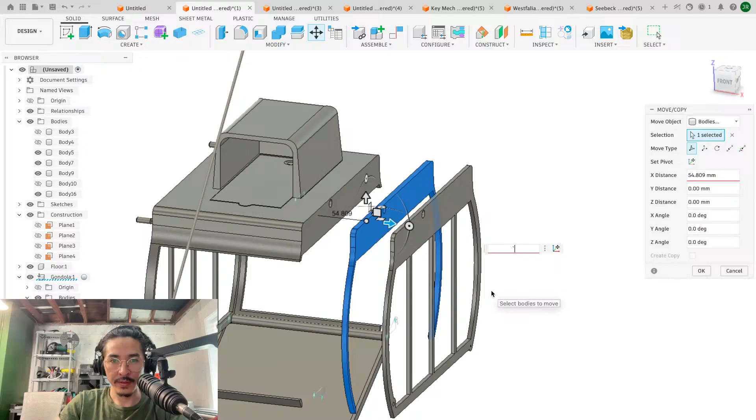Okay, so I'm gonna bring this back to...

I'm so excited to be cold tonight. I wanna get one of those mattresses that cools your body. Were we talking about this already? Or I don't know, I might have been talking about this with somebody else, but I want the part of my body that's on the mattress when I'm sleeping to not always be on fire hot.

That's honestly a good way to be, especially as the world starts relying more and more on this stuff and people are getting less and less knowledgeable and careful. I wish I had more people in my life that were a lot more diligent about that kind of stuff, but I actually just don't have that many. I don't spend that much time around other people other than my wife.

Okay, so I'm just trying to decide, I'm just going to keep splitting this up until I figure out which pieces fit together. And I've got like maybe a hair or something on my beard that's driving me crazy.

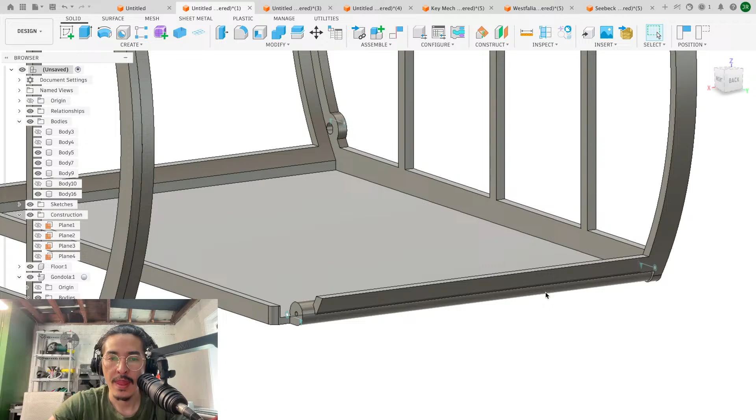So this all works if these two were together. If this was connected, if this is one piece, that would print real nice, that would be the easiest print ever. And so would the top here. The part I'm struggling to figure out is this bottom piece on both sides. I might just have to beef it up.

That was creepy, my door just opened on its own. It was probably just the wind and it wasn't latched. Let me just close it, it's freaking me out. Who's the paranoid one now?

Oh yeah, that's nice. That is nice. I couldn't tell you what's going on with my phone.

Okay, so yeah, basically, this is a good single piece, I think. This is a good single piece. We'll do the same with the other side. I just don't know what to do.

Oh, stream boo, get... boo, stream boo. Yeah, Ruby, you tell him. You tell him.

Okay, let's just go for it again here. So let's go with a splizzy. We're going to splizzy this guy. We're going to splizzy at that point. And we're going to free move.

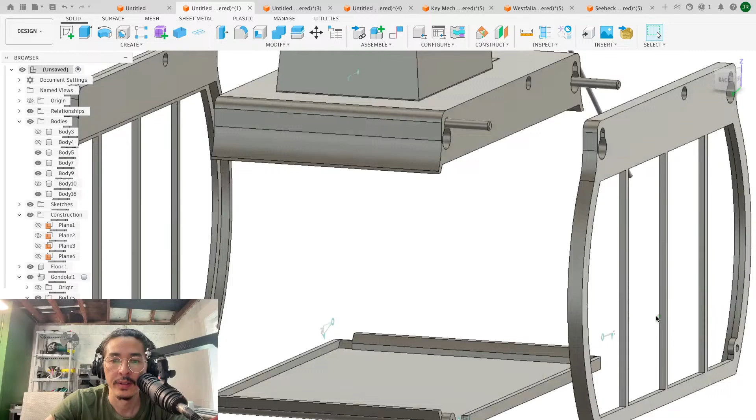So it's these pieces that I need to join to this in a way that... Oh yeah, and the other thing I wanted to think about too is how am I going to attach the acrylic windows inside of this?

Oh, awesome, you're the best.

You know what I was thinking? Because originally I was going to cut an individual acrylic thing for each window, but I may as well just cut this whole acrylic thing. And then I could even have it so that once this is screwed on, it kind of locks it in place. So I don't even need to add any adhesive or anything like that. I think we're going to do that.

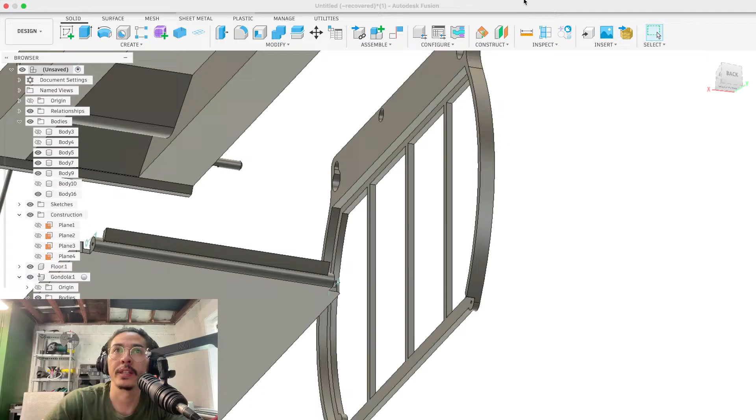I guess what I don't understand is when I block them on Restream or whatever I'm using, they just disappear. I don't see anything that happens after I block them. But you're actively getting them banned, which is dope.

5.861 mils. I think the acrylic I have, let me just take a look. Let me pull it out and see what I got.

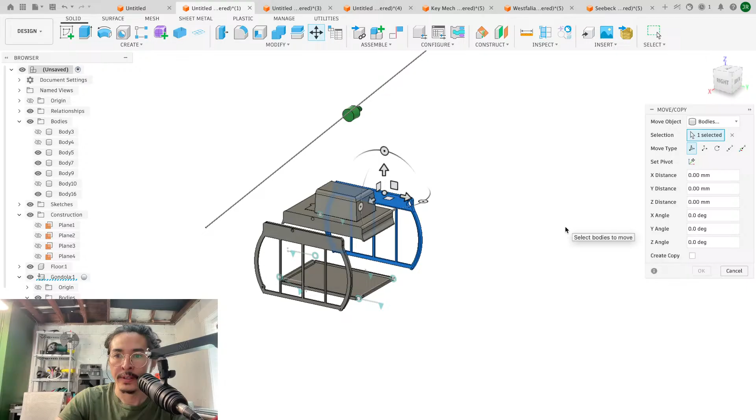So here's what I'm going to do. This piece obviously, like I think the acrylic piece is just going to be this. Oh wait, that is not a straight line.

I know it's got paper on it, but let's see how thick this is. Three mils thick, pretty much on the dot. So -3. New body. And so the issue is I only have these 2 sheets right now.

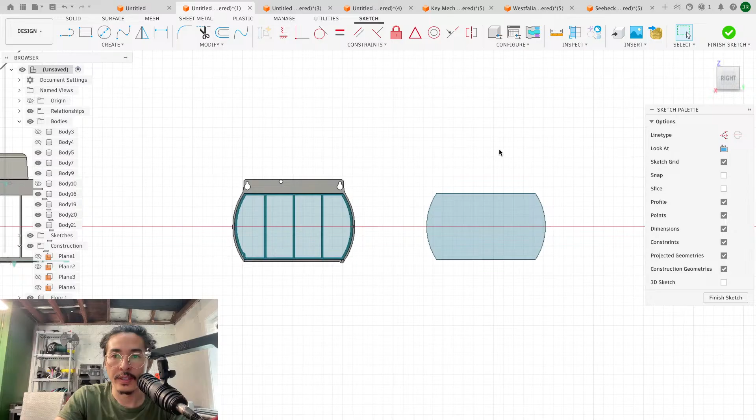The other annoying thing is the laser cutter on the H2C is too small to fit.

So one pack of these basically does - each pack comes with 2 of these sheets. So that's enough to do one. It's like 1.5.

Yeah, so this won't fit inside. This won't fit inside the printer. Unfortunately.

One pack has two of those sheets. So what if I wanted to get more of this? $60 now? No, that can't be. Wow, the black? Okay, 4 pieces for $33.

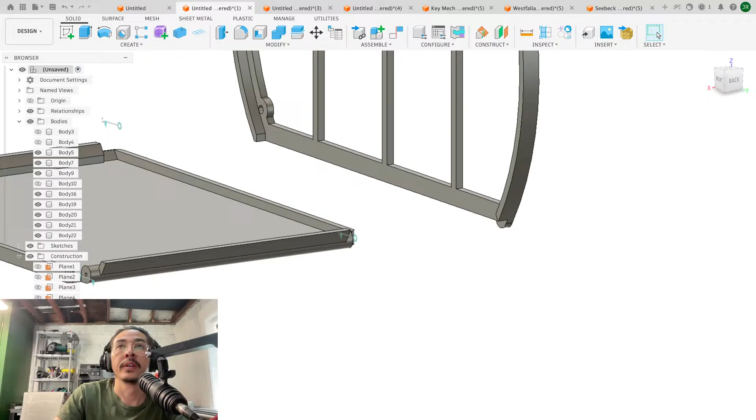So, yeah, I'm just wondering if it's worth it, because the problem with these 12 by 16 sheets is they don't fit. They fit inside my laser cutter, but they don't fit inside of the H2C.

I don't even know if I can. Okay, actually, let's see if this even fits inside of the H2C at all - acrylic window, side panel.

It's lagging. Oh my god, my whole computer's just not having a good time right now. Is it that storm? Okay, let's let that load for a little bit, we'll figure this out in a minute.

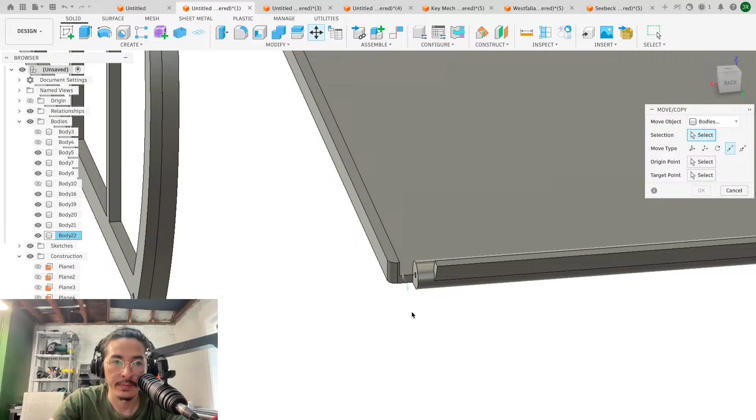Oh, that is so wrong.

So I just need to beef this up, because if I beef this up, then that can be what locks the acrylic down at the bottom. I will also have to...

What up, ragamuffin? What about banana bread, where's he at? I know Ruby's here. Yeah, Ruby's here, I haven't seen banana bread yet.

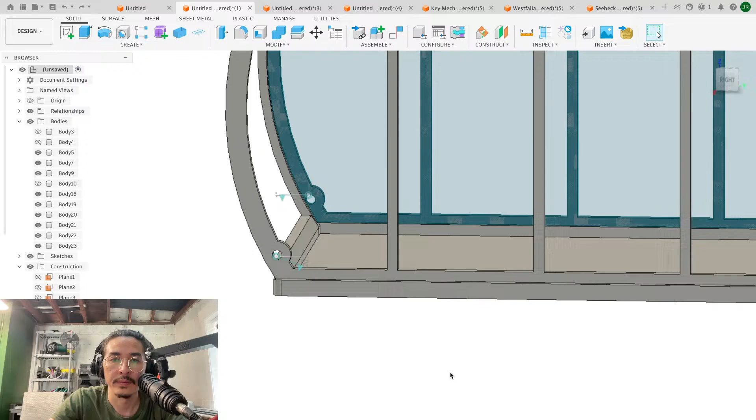And then I will need some sort of space to put the curved acrylic piece on here. I don't quite know how to calculate how big of a piece that is.

I'm zoning out. I'm zoning out, folks.

Teaching sounds fun. I have a lot of friends that teach. And my dad was actually an elementary school teacher.

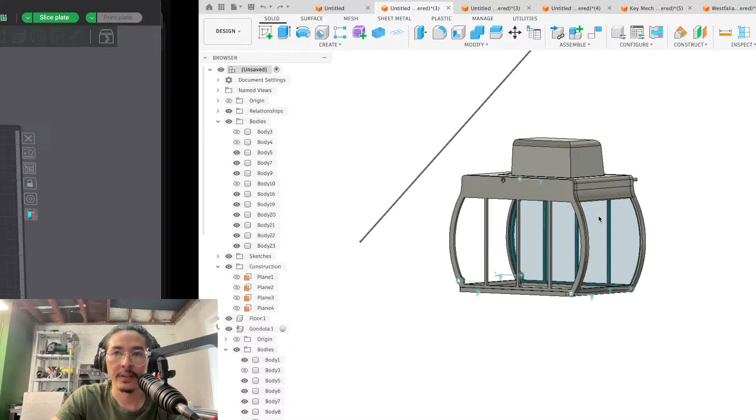Okay, it does. I've never laser cut anything on the H2C, I don't even know how that works. So I'm going to have to go with my regular laser cutter, cut out a square that fits on this build plate, and then put it on. Yeah, realistically I would just cut it all on my regular laser cutter, but setting up the H2C for laser cutting — I've never seen this.

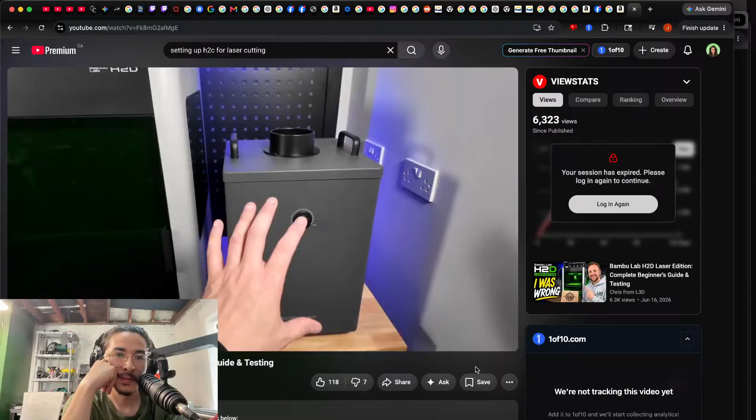Yeah, I didn't get the extractor. Oh no.

I know this isn't super interesting, I just want to— nice, okay good. I just want to see how involved this is, because this is part of the process I haven't really anticipated yet.

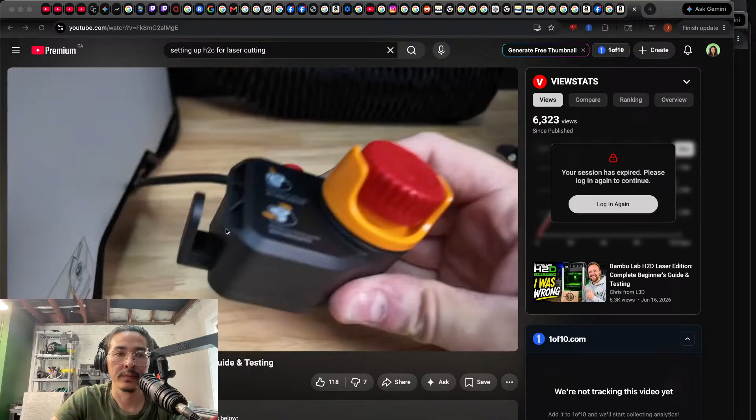Oh, that's kind of nice, I didn't know that. Yeah, I just need to see what I'm going to be expecting to do here, because I didn't even— this just magnets on, I did not know that. That's interesting.

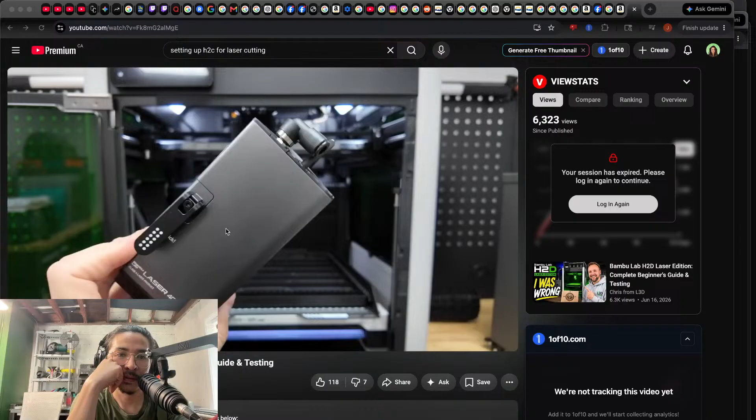There's quite a bit I've got to do. Oh, it literally just sticks right on the front. Oh, that's kind of dope. Oh my god, that's nice. Oh, that's what that PTFE tube was. How does the air assist work? What is it?

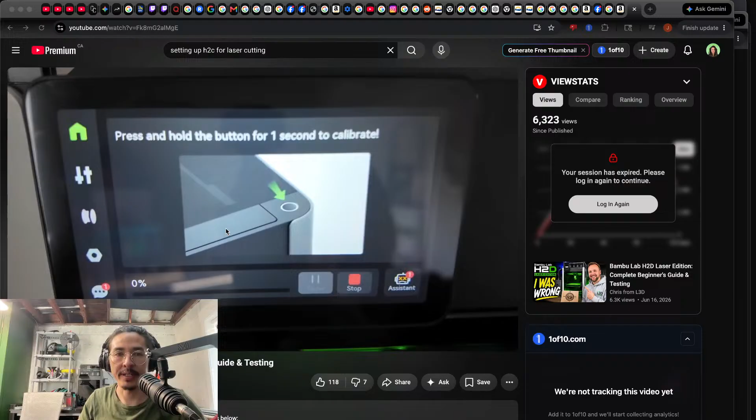I'm going to do most of the cutting on my main laser. I just want to basically— this is an opportunity where I can show, for people that don't have a laser cutter but have this printer, what they might want to be able to do. I don't know.

Oh, okay, that makes sense. I'm also cutting clear acrylic, which diode lasers are not meant to do. But my understanding is as long as it's got some sort of opaque cover on it, it can cut it.

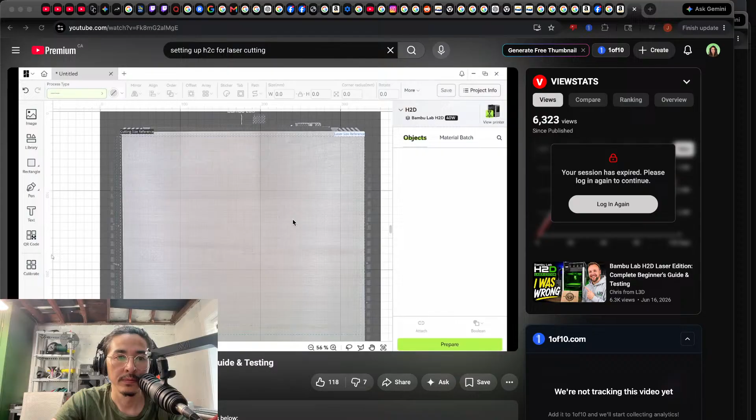Now this feels like my laser cutter. Okay, yeah, so I think we'll be fine. I think it'll be fine.

So we just have four pieces to cut. We've got two of the wall pieces and then two of these side pieces. These side pieces I'm going to have to bend.

I'm just going to use a heat gun, but I might need to print a little mold that I can bend it on. And then how do I hold it in there? That's what I need to figure out — how do I hold that piece in there, and hold this piece in here, and ideally use the screws that screw this whole thing together to hold all the acrylic pieces in. And I think, okay, so let's start by just cutting this part out.

Oh, didn't mean to cut that part too.

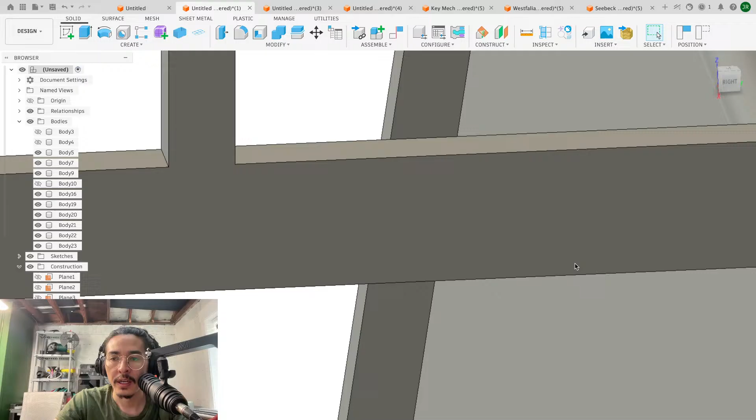Technically, my whole life — my grandfather was a builder, and every time I would go to his place we would build stuff together. I've always been taking apart my toys and rebuilding them, or trying to build my own stuff with parts from toys and everything. So it's kind of like a lifelong passion. It's weird because I never had any classical training in it, so there was never really a point where I can say I actually became an engineer. It's always just been something I do for fun.

But I don't feel like I really understand a lot most of the time, and I do feel like I'm a forever student.

I've been CADing stuff for a long time too. I guess I only actually started doing CAD on SketchUp when I was—

What do you mean you just crashed? Oh, did the stream crash, or did you crash?

I agree, I agree, I always want to be learning. Boat, what happened? Tell me, Boat. Boat, we need an update, Boat.

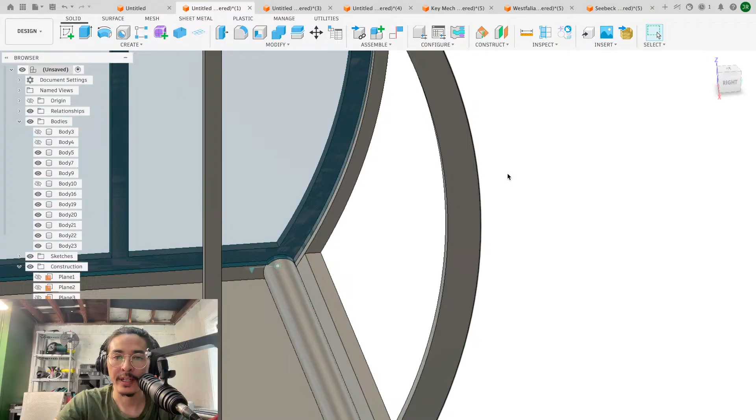Also, whenever I'm just sort of sitting idle, I start thinking about designs. And so being able to CAD things is a really good way to take what's in my head and bring it into real life quickly with minimal effort.

That's what I love. Now I just don't really know how I'm going to— yeah, you guys are both fact hounds.

So I need this thing. I mean, I guess it could just sit on the inner part of all of this. So I can extend the frame a tiny bit.

Okay, let's do this for a second. Let's get rid of these guys. And let's just assume...

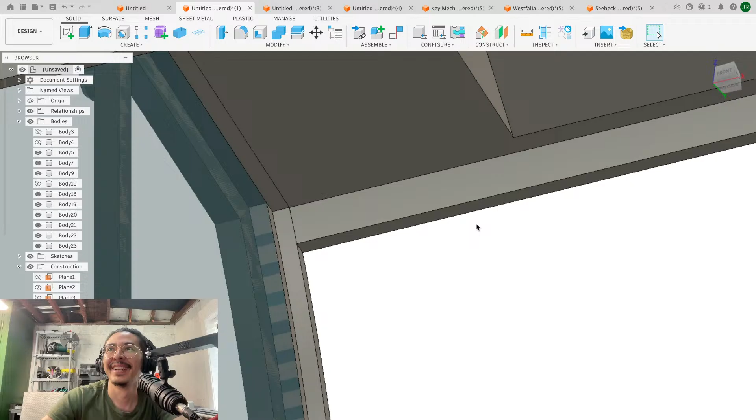Okay, so now I can basically extrude this all the way to this side, right? Cutting it the whole ways away. Oh no, not that far.

Okay, so let's move this, create a copy. Meow, meow, meow.

And we will connect it up here, I suppose, to there.

I don't get the Bugs Bunny reference.

Oh my god, I forgot to mention. I already forgot about the carrot cake. Oh god.

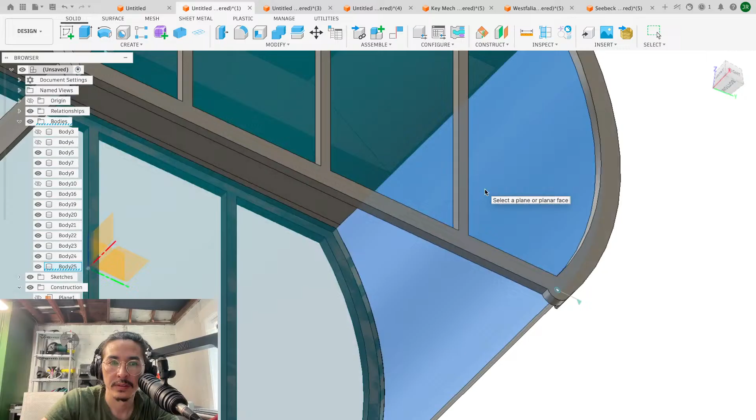Whoa, what the heck just happened? Press pull, yo. 1 milli.

And then make that clear. So see how this clear piece holds in this other clear piece.

And now I just need something that holds in this clear piece. What? What? Clearly.

So I think I'm going to make a slot up here. I'm going to offset this by minus 0.2, I guess. And then just have like a thingy that goes like this, I guess. And then this can just go up here, I guess. And then this can come around like this, I guess.

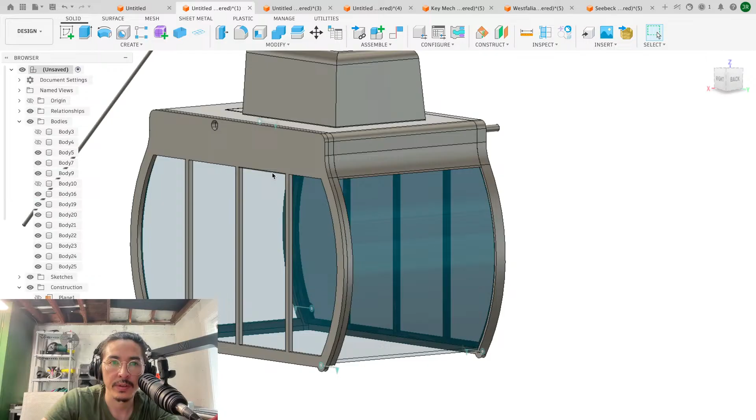So the bent acrylic thing fits inside this nice little boy between these. Why is this acting like it's its own body? Oh no, oh I see.

I'm just gonna bring this in because it doesn't actually need to stick out that much. Yeah, so it's a single piece.

So that little slot will hold that, and realistically, this guy is probably gonna be like this guy because it'll be cut out of a straight piece, and it's not gonna have that taper on there. Cut out of the straight piece and bend, so it's gonna kind of fit like that, which is fine.

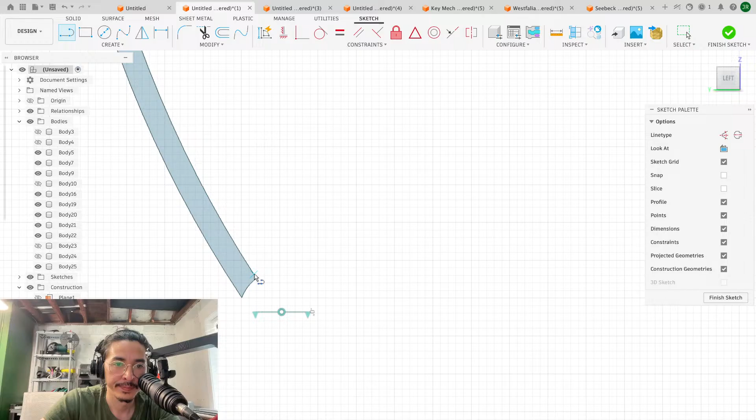Okay, so that's that. This acrylic piece fits right in front of this one. Oh, why is it like that though? Oh.

Yeah, it's literally just an acrylic box now. It's all kind of held together by itself.

I think I'm going to have to print a mold.

But there's going to be layer lines on it, which is no, that's fine. No, that'll be okay. Actually, that'll be dope.

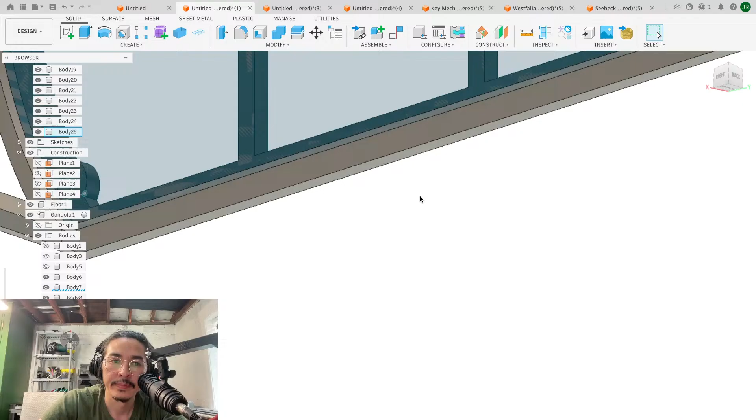Okay, so up here, obviously, we're going to have a couple screws that combine these parts nice and easy.

Yeah, I'll just do a couple screws. Boom, boom. And then...

How do I combine them at the bottom here? How do I combine them at the bottom here?

Without giving the mice a lot to grab onto is the key. That is the key. Where's my floor boy? What is that? Oh, that's my leaf. There's our floor boy.

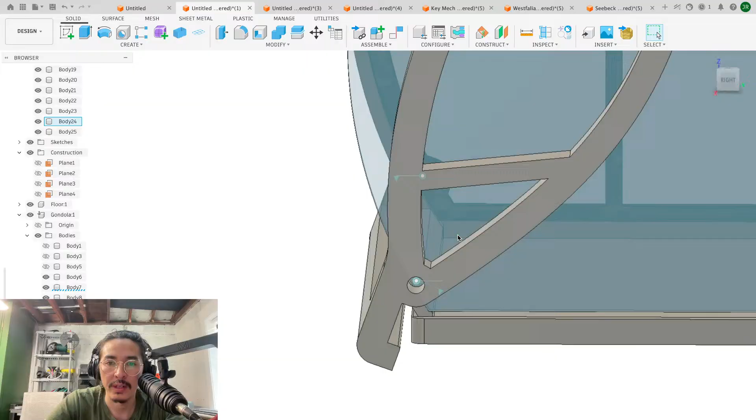Also, oh yeah. These two, oh no, what am I doing? These two, no, what? Oh, right there. So these two pieces are the same piece. Let's combine those.

This will be nice, I think. Oh, it's gonna be so much work.

Theoretically, I was supposed to have this video done by the 20th. That's not going to happen, but it's okay. That's in 5 days. That's not going to happen. But that's okay, I've already confirmed that it was not going to happen.

Now I could have like a...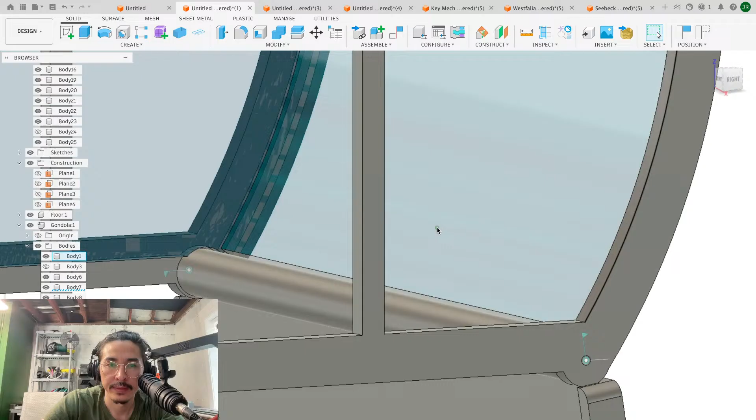Actually, it works perfectly though, because this will rotate. So even if they were grabbing onto it, it would rotate out of their little paws. So I think we're actually good there.

Am I getting things rubbing here? It's probably a little bit of rubbage going on. There we go, that's less rubbage. That's almost zero rubbage as far as I'm concerned.

Oh yeah, exactly, exactly. And that would be a great moam. That would be a great moam. And you guys know I'm all for the moams. When I was on tour, that was a big thing we would say. We want to make moams. We want to have lots of moams in our show.

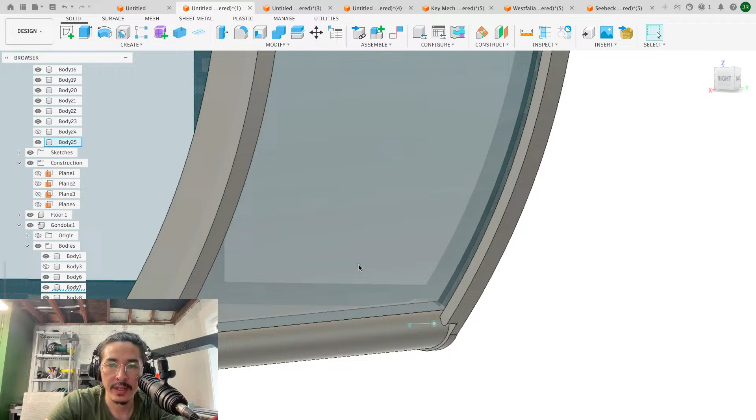Okay, so I'm really happy with how smooth everything is on the inside. I guess what I can do is just create a little thing on the outside that allows me to screw them together. So let's just visualize that. Let's say this has fully opened and it's stuck in that position.

Just spitballing here for a sec. Tangent.

And then let's go with, what, 5.2, right? And then 4.8 for the one where it grips in. So we can go like this.

Oh no, that's not going to work. It's going to cut right into that. Okay.

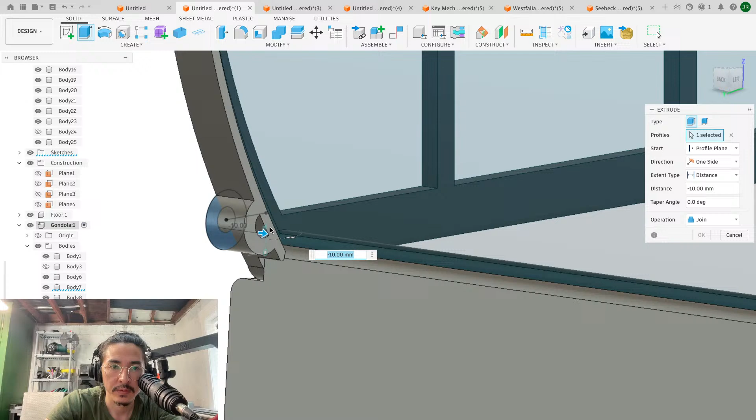That cuts in. Okay. Could have verified that beforehand. I did not.

That's a really good question because you might be able to avoid it if you just refuse to sell them round trip tickets. Yeah, no, they're not getting discounts. Because MOME, obviously it's coming from moment, so MOME makes sense, but then I like Moem, it's kind of like a poem. Which that's also a MOME in itself. So it's a really good question.

Okay, let's just kind of go out here. Maybe, I don't know. Now I've broken my rule about having an arbitrary thing. And then can I drag this back? So that references that point. Let's do this.

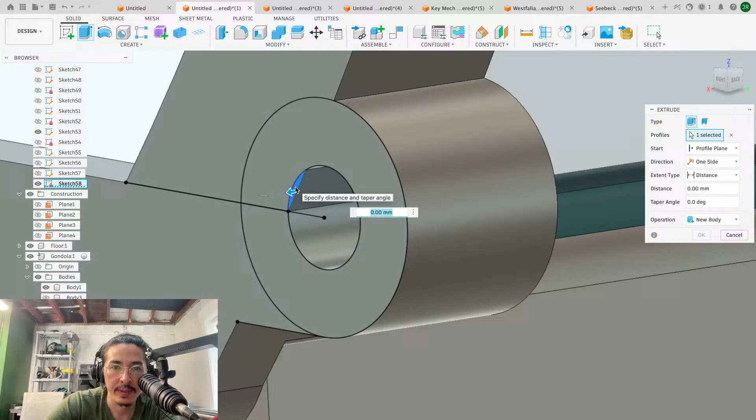But at a certain point, it's like, is there anything wrong with that? I don't think so, necessarily.

So let's add that here as well. I mean, that looks kind of dumb, but it's not the worst, it's not the worst thing I've ever seen.

Thank you, Aaron. It's not the worst thing I've ever seen. You know?

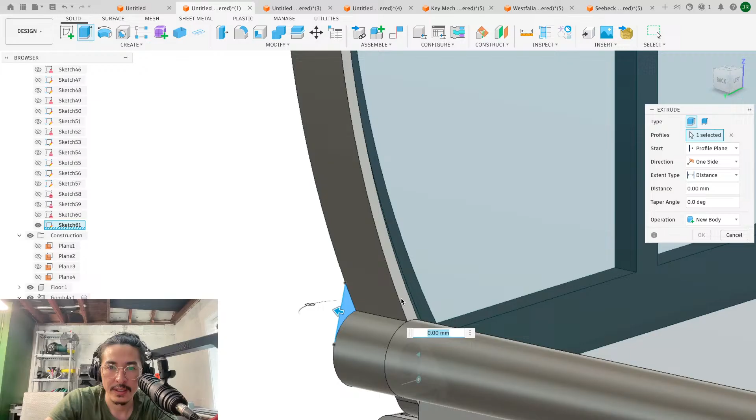So we can go like this, to here. That looks better, yeah, that looks better. And then I can make this little pole a different color, which would be fun.

I like that. I'm into that. That works well. Wait, let's play with colors a little bit too.

So, this is gonna have to be black, or green, because that's all I have. But I think black looks good. And then what do I have? I have red and blue. So let's just go with red for a second. And then maybe we make this part white, yellow. And then this part obviously green.

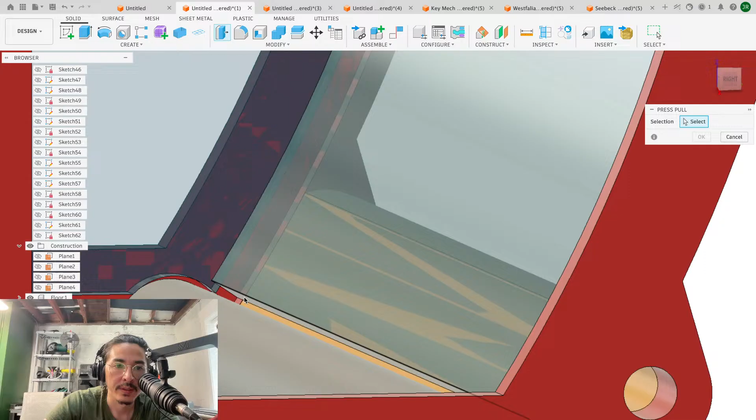Now, because of this whole thing, oh, you know what I'll do? Here's what I'll do. Yeah, honestly, glue probably will be the move, but I could make the acrylic this big or anywhere, as long as it's okay. So I'm giving myself this much leeway, I guess. So as long as it stays within here,

which, how long is that? This whole thing is five millimeters. So I'm giving myself like 2.5 millimeters of leeway here. And as long as I give myself 2.5 millimeters of leeway here, then that'll be pretty good, I think.

Wait, what? Wait, what am I trying to do? Nah, you're right, let's just ignore that. We're just gonna go like this and glue this.

Oh, I could do little screws. I could do little flathead screws because I have little M3 screws. But then I have to make sure. I have to really make sure I get the acrylic right.

Okay, glue. Glue it is, because I can just glue this panel to this piece. I'm going to do that. That's so much easier. And then even if I'm slightly off and it ends up being a bit shorter, it's fine. Okay. Yeah, glue's the way, because if I do M3 screws, then it has to be so accurate, and I would have to cut the holes out of the acrylic beforehand before I even bend it.

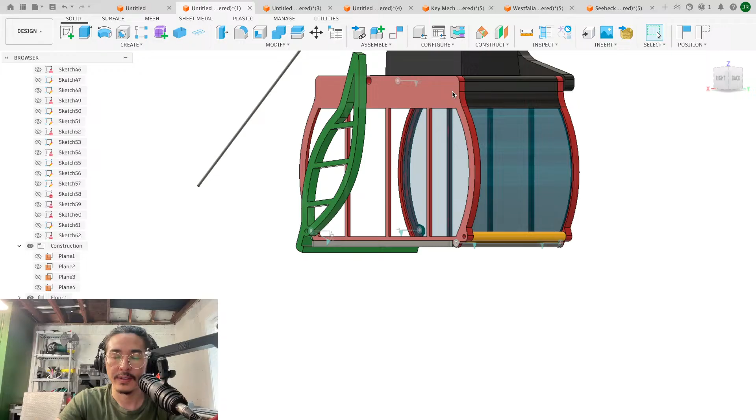Okay, so we have this side done. This side's great, I'm really happy with this. I like this. Now I need to add screw holes.

So I'm going to use my... how wide do I have one of these that's like, okay, here we go. 3.5 mils. And how wide is this? 10 mils. Okay, great, great.

So, get rid of this. I can throw a couple screw holes in here. Boom, boom, boom, boom, boom. Let's go center, so I only have to do the one. And

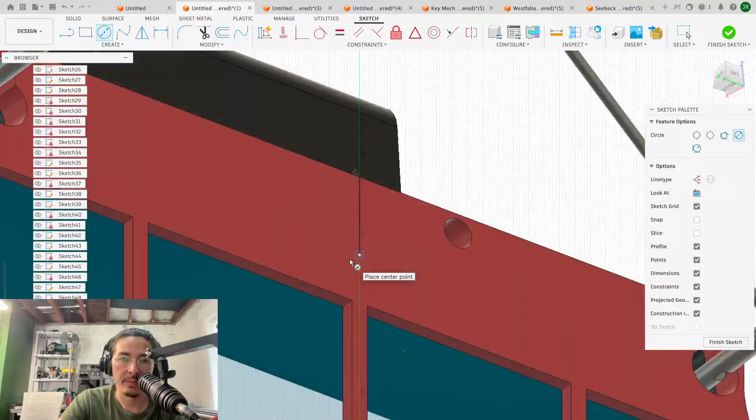So we can go maybe one kind of lower down. Let's make it pretty robust. So we need a 5.2. We need a 4.8. And we need a 10 mil. We need a 10.

And then let's do this. Oh my God, where'd you go? And then up here, I don't know, I'm just going to be arbitrary about this. Or I guess I can line it up with this. That would probably be nice.

Oops. That's going to be arbitrary. I don't even care. 5.2. 4.8.

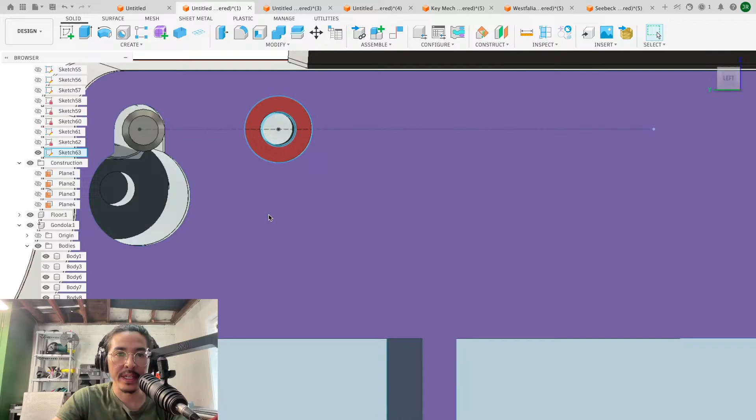And we run these just this far. And then we take our tendies and we run them -4 mils. So they recess. So they be recessed.

Okay. And then I have to do the same on this side. So let's create a sketch on this side. Let me project all these bad boys. They're such bad boys, I gotta project them. And then I can go and extrude them.

Boom. Okay, so that's how we now connect to our top guy. I'm liking this.

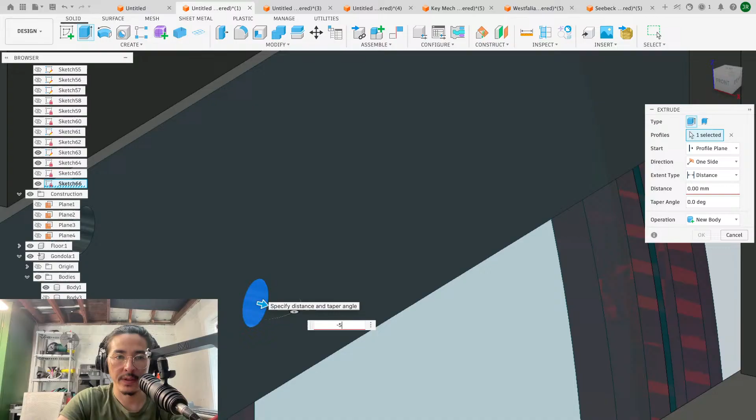Realistically, I don't need this hole to go all the way through on either side. So let's just block that off. Boom. Okay.

So I think the top of our gondola is done. Oh no, not quite, not quite. I have to do the acrylic on this side too. And then I have to figure out some sort of way to combine them on this side as well.

Let's start getting rid of some stuff for a second because I can't even right now. I literally can't even, as some would say. Some would say that.

So I don't have a particular reference point for this. But what did I do? I pulled it back. That's what I did. So okay, and this is gone. That doesn't do anything.

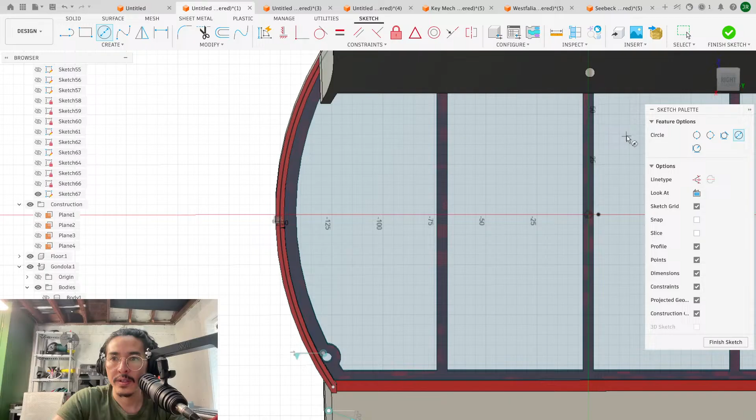So we can sketch here. What happened? We can sketch here. We can offset 2 millis. And then I did the 3-point circle so that we can carry this up the whole ways.

Yeah, just like that. And then where did I do the line? I brought it back up top. Okay. And then so we can project this guy. And we can draw a parallel line like that. I don't know why it wasn't letting me click that.

But now we can extrude that and that. Right back to our acrylic. Okay.

Now on this side, I don't have the luxury of anything kind of, well, we'll see, we'll see what luxuries I have. Press pull this guy negative 2. Perfect.

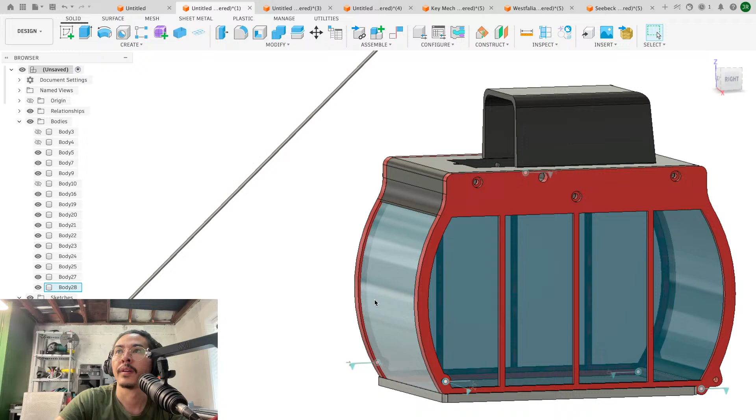What should I use? I didn't know that. I've never tried gluing acrylic, but I didn't know that. What do I use? Chat, tell me.

Honestly, I'll tape it. I'll tape it. Let's be honest here, folks. I'll just tape it. Duct tape.

Okay, and then we grab this guy. And I'm just going to be arbitrary about this too because... Oh no, that's fine. Okay, let's just go with it. Boom.

Extrude this. And this. Back to here. Okay, and then I have to bump this out 1 mil.

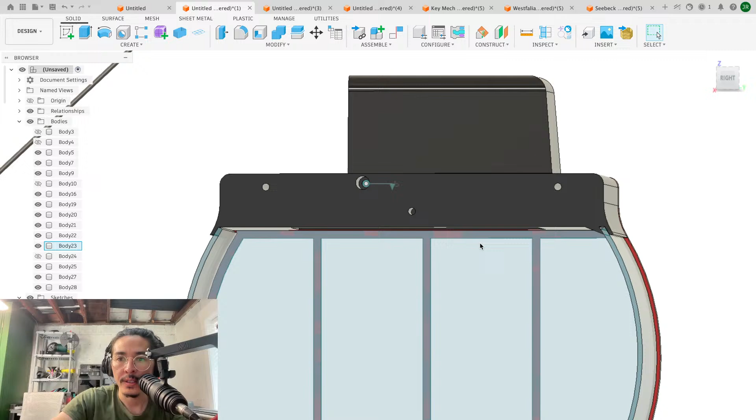Okay, I want to match this exact. I want to match exactly what we did here. So let's go with a sketch. Draw a center line. Okay. Project this. Draw a parallel betwixt these two. Nice.

Mirror this, and this. And that, sure, I don't know. Mirror it here. Okay. Bring it to here. Okay. Oh, shoot.

Let's make that a new body, don't we? And let's combine these two.

We're likely to end up with just an ugly look as long as the stuff is real acrylic. You can use things like special acrylic glue. However, it's common enough for things like polycarbonate to be mistaken as acrylic and it will melt. Yeah, this is cast acrylic. It's not polycarbonate.

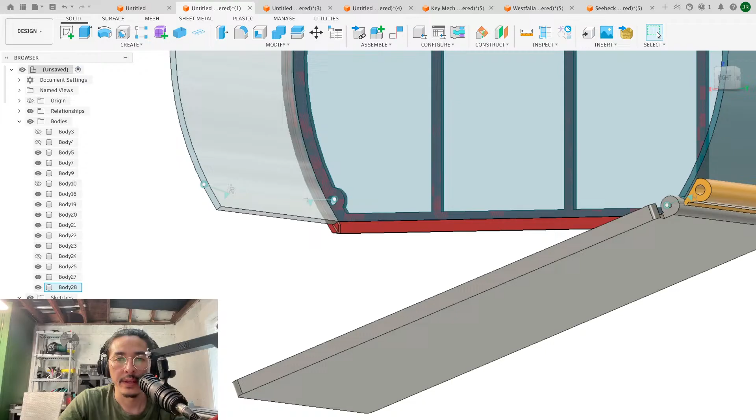Yeah, I don't need to use super glue necessarily. I just need to use something to kind of mechanically hold this together. Okay, so yeah, so I don't have. Okay, now the roof is done.

Oh, I guess I can add that chamfer back in here. Nice, nice. What if I did a chamfer here? Do I have the leeway for this? You know, make the roof look a little nicer for them.

The only thing is then those holes kind of suck now, but that's okay. I think I can make those go away. You gonna tell me where that was? You can tell me where that. Okay, there we go. So it's probably this one, I'm assuming. Yeah. So let's pull this back.

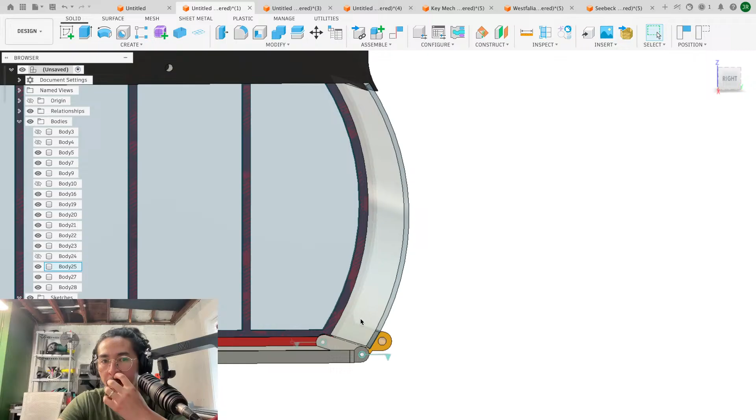Because actually right now, there's nothing holding the bottom from being pushed this way, because there's nothing on the sides holding it, and there's nothing on the bottom holding it. The only thing that's holding this in is this tiny little area up here. It would be nice to send screws through here into this. Is that a risk? Is that a risk I'm willing to take?

You would never see it from... well, you would see it, the mice would see it. So it's like, is it worth affecting the mouse's view?

It's kind of hard to say. Oh, this is another issue. They literally might... that's what I'm concerned about. They might not appreciate that. Yeah, I can't afford free trips for the mice. I simply can't afford that.

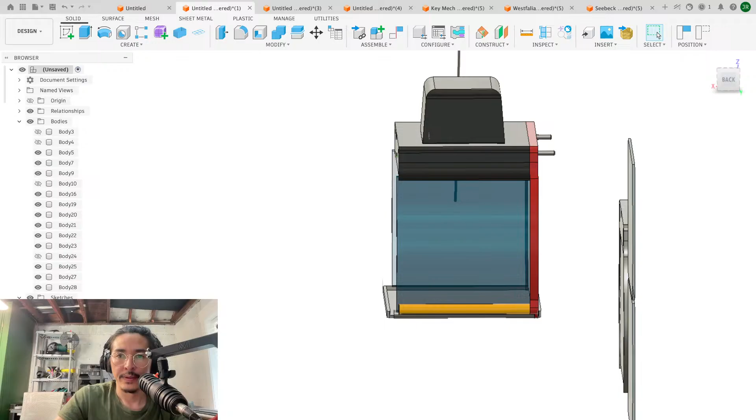Okay, so we got 4 millimeters of... okay, this is pretty close. I feel like I can start printing this, but I just don't want to jump the gun, you know?

Yeah, right? I'm just thinking about the customer service. That is true, you do make a good point.

Now, alternatively, how accurately can I make this? How accurately can I bend this to be exactly this length? Oh, because I just have to go like this. Length: 173.297.

I just don't know how it's gonna change when I bend it. Oh, this looks so good though. I'm stoked about this. What if I made this guy white?

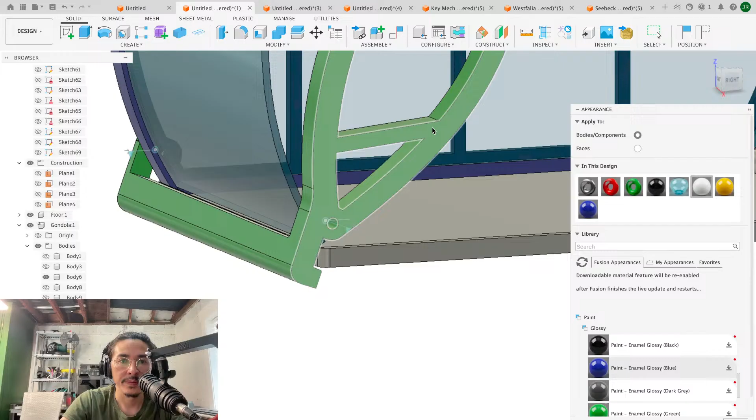What is happening? What is happening? Where'd you go? Okay, there you are.

This won't be in the way, actually, especially if I add a fillet here. Kilimanjaro.

Whoa, what happened? Oh yeah, that's okay. Ooh, that looks nice. That looks nice.

I mean, there's not quite as much space as the other side. But it's not bad. Oh, the only thing is...

Yeah, I've got lots of black material too, which is great. And all my black material is ABS, so...

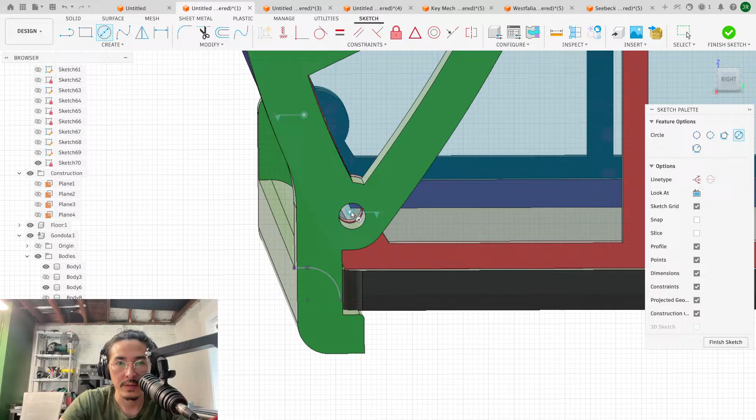Okay, so let's create a sketch here. Let's project this guy, and let's do a circle to this guy. So that's how much room I have. It's not a lot. That's not a lot, but it's enough. Hashtag mouse modesty. Modest Mouse, the band.

Yeah, unfortunately, it would be nice to do the exact same thing on this side. Actually, let's do that. Let's do that, yo. Why are we wasting time with this?

And then I'll just bump the leaf out further. As I brought up during yesterday's stream, mice only need a 1/16 of an inch to climb a vertical surface. Any lip, like the hinge pivot of the bottom, that will have decently pronounced layer lines will be something they can grab.

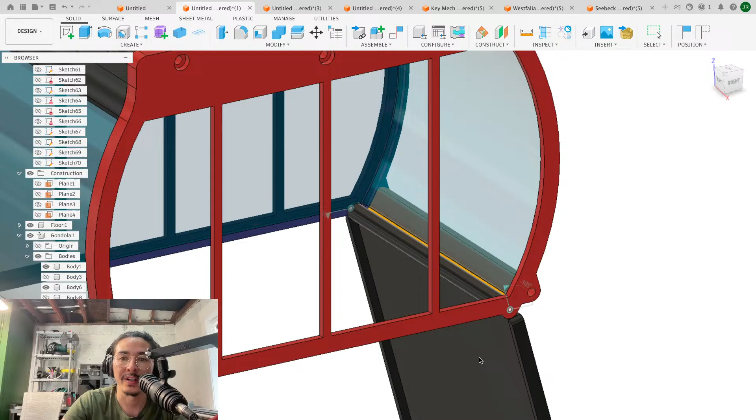That's the other thing, I think, the surprise of this opening. But even if they're grabbing onto this, there's no way they're hanging on. They're falling off. And aside from that, you've got smooth acrylic here. So if there is a screw here, that is something they can grab onto. But if we go with glue or something, then there's nothing to grab onto. Nothing to grab onto on this wall. It's all smooth acrylic, and the acrylic butts up to the other acrylic.

So there's literally like... I mean, I'm sure they're going to find a way. Let's be honest. But that's a moam, yo. I'm open to moams, as long as they're just not always doing it, which is entirely possible, because they're determined little buggers, aren't they? Determined little buggers.

Cut that. Oh wait, what? Oh no, that was right. Yeah. Join that. Cut that. And then theoretically, I can do some mirroring stuff. No, no, yes, I can do a mirror with this and that mirror line. Oh yes. Oh yes.

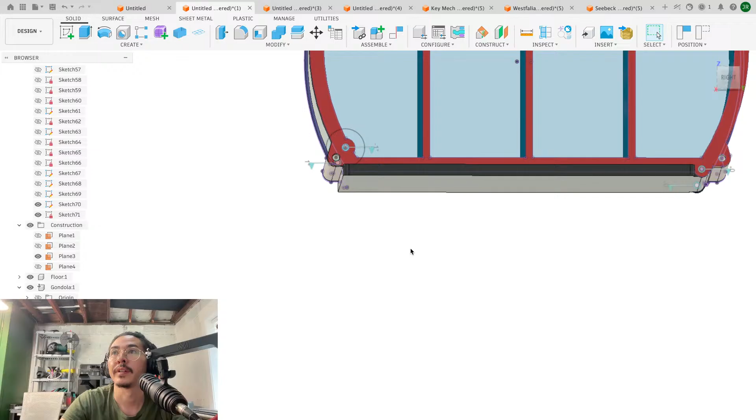So theoretically, I'm going to have to get rid of all of this. Oh God, that looks so good.

Enduring rodent, I watched way too much about mice strength. I don't got mice. Lucky, but also it's hard to be optimistic with mice. It's hard, they don't make it easy.

I feel like this is good, yo. What do we think? Yeah, specially trained ones. This feels good. The only question mark is joining this. But oh, you know what? Worst case scenario, I'll just hand drill it after I bend it.

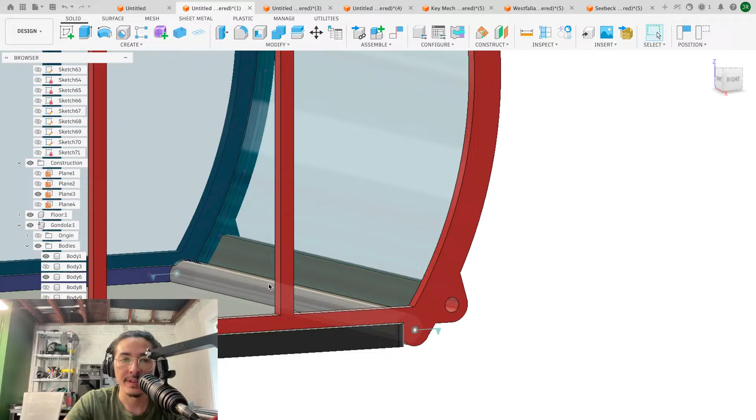Rodent ops. Yeah, no, I definitely don't mind being thorough about this. I want to catch everything as much as possible in the planning stage. But yeah, I can just put this in after bending, put this in, and then just drill this manually and add a little bit of a chamfer, and then I can do my little M3 screws, which are flathead, and have them sunk in a little bit.

All that said, I think we're good to go. Oh wait, how am I going to assemble this though? So I'm going to have a wall piece. I'm going to put the acrylic in there, just kind of sit it in there. Screw these together. Okay, yeah, it'll be fine. It'll be fine.

Let's start printing this, yeah? Let's start printing this.

What's payday 2? Wait, wait, what is this? Why? Oh, yeah, the colors, okay, you're right. Well, it's going to be—I'm going to do it. I'm going to do a red one first, I think. Ooh, do I want to start with red? Do I actually want to start with red? I might start with white because I have like a ton of white. And this is technically still a prototype.

So I'm going to print 2 of these side panels in white. Print the top and bottom piece in black.

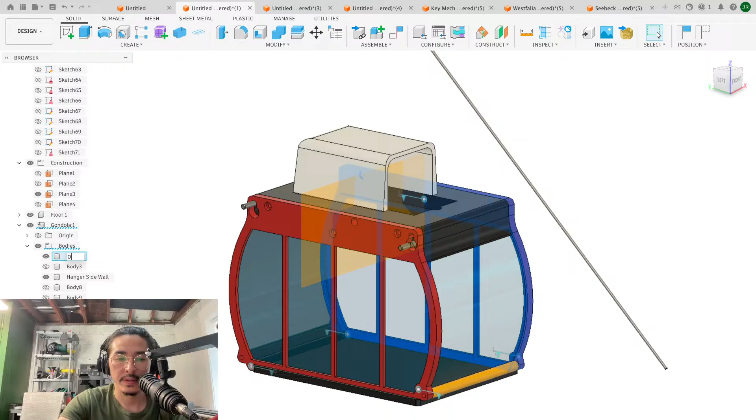Okay, let's do this, yo. Let's do this, y'all, this is exciting. Okay, wait, let's label this. So we're going to call this side wall. Or I'll call it hanger side wall, I guess. I'm just going to call this other side wall. And this is gondola roof.

So, oh yeah, and then I guess I'll do floor. Trap floor. I'd imagine maybe, but I don't know. I don't know. Oh yeah, this is the trap house. Okay, that's right, so let's save this. Okay, and I'm going to call this trap floor 1.0. Boom.

Gondola roof 1.0. So let's get those 2 printing first.

Which printers do I have my black filament in? Oh, you know what, this one has none. This one doesn't have black or white. But I'm going to do the walls on the H2C. So let's switch to the H2D, because the H2D's got the big schnoz.

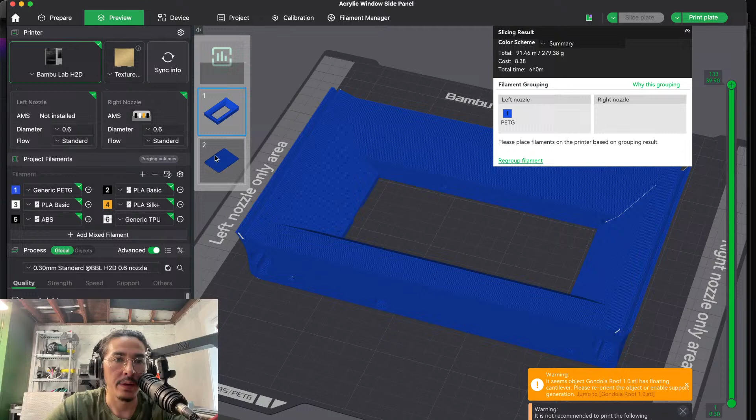But we're gonna make this change to black. 3 hours and 11 minutes.

It's saying there's cantilevers, but I don't think there's anything crazy about this. I don't think I need that much infill either, so I'm going to reduce the infill to like 5%.

Just need to look at what the features are going to do in there. That didn't really change too much, so let's go with 10%. Kind of split the difference. Yeah, that looks stronger.

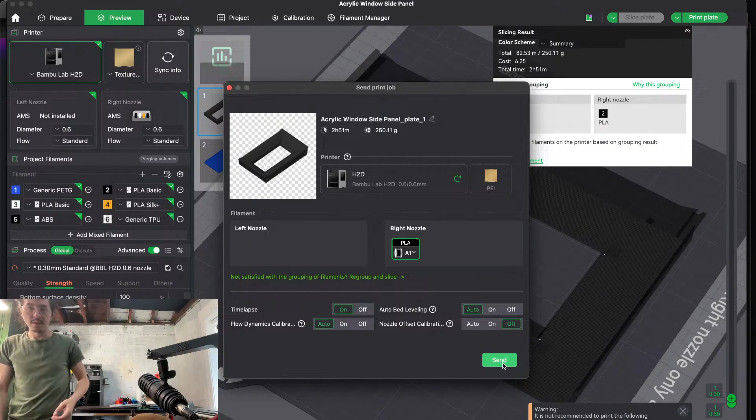All right, let's just go for it. Hold on, I just gotta check, make sure the thing's clear. Okay, and we're gonna send. So that's gonna start now. Okay, and time.

We're gonna go to our H2C. Delete, delete, let's just delete that plate. Hanger side wall. Auto, nice, look at that. That's a great print, that is a great print. I gotta load my white, give me one second.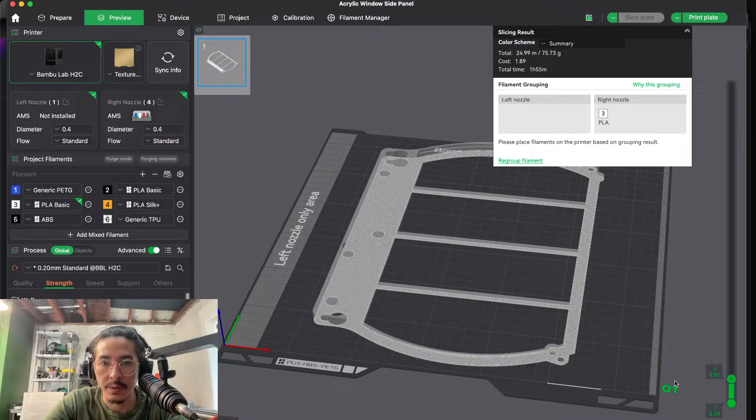Slice. Oh wait, oh wait, oh nice. It's so crazy that it does that automatically. Slice. Nice, taking a look. That all looks quite good to me.

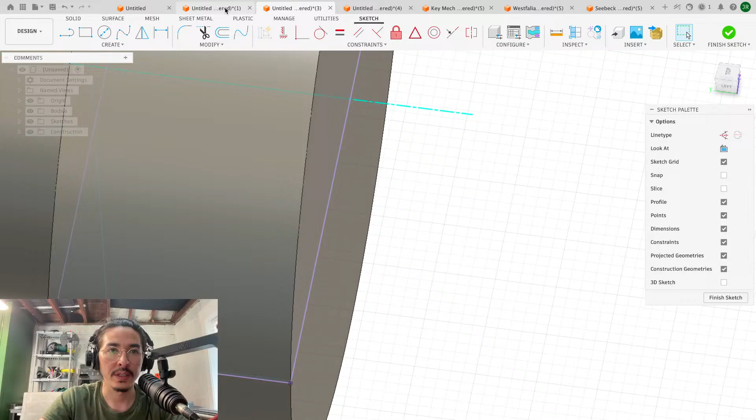So, like, you know, I could do a 1/8 inch groove around this whole thing. But I don't know. Like, how well is it going to stay on that groove? I don't know. And then alternatively, whatever I have that's hanging on to the cable here is going to be bigger than an 1/8 inch. I guess maybe I need to kind of figure this out quickly.

So I was thinking about doing something kind of like this, just basically a straight piece. Like an 1/8 inch is not a lot. If that's metal, that's a lot. But this ain't metal, yo.

This is the part that I've been kind of struggling to figure out. Where's my cable? I have it in here, don't I? Hang on, I'm just going to go grab my cable quickly.

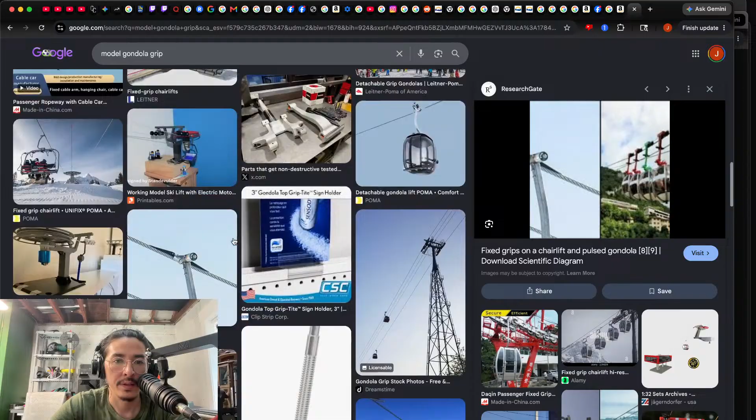But then when it goes around the bull wheel, I guess those aren't necessarily super strongly attached. I don't know. But for such a small little gondola, such a small little cable, I'm struggling to figure out what to use. You know what I mean? Like, what do I use?

Model gondola wheels? I don't know what to call this. Model gondola support rollers? What? Yeah, this. So see how the wheel, like the cable is big enough. Cable car rollers.

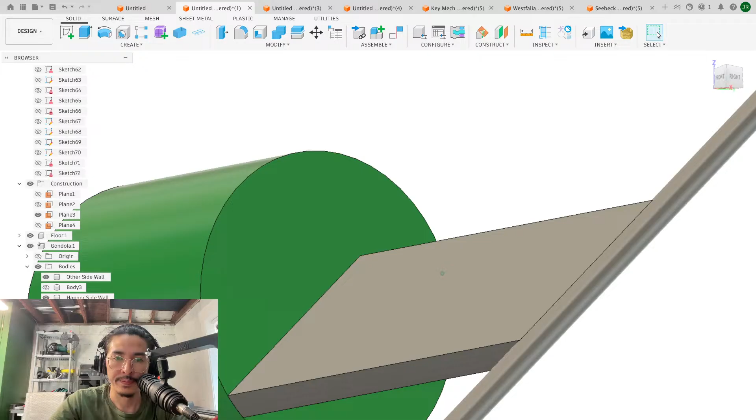I'm wondering if we could do this with a 3D printed part to an extent. So we have this guy, which has the nice groove cut out, and then we have this sort of like — what have I done? What have I done? We have this kind of deal. And we can add all this material on top, we can go up 2 mils.

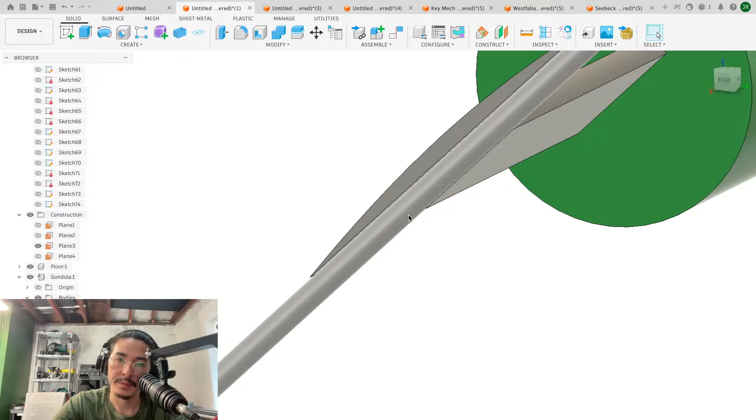Now realistically, these super thin areas aren't going to get anything, but we go like that, and then we just have a hole back here. And then I can just zap strap this.

Just, how small is this? I don't even really understand what this is yet. Oh, a zip tie. Is zap strap a Canadian thing? Did we find another one?

I do think I'm going to be able to figure something out for this. I think I am overthinking it as well, I feel like it's just going to kind of work. Famous last words. Now my big concern with it — I think we could probably make this bigger, we could probably go with a bigger... hilarious. We can go with a quarter inch, like that.

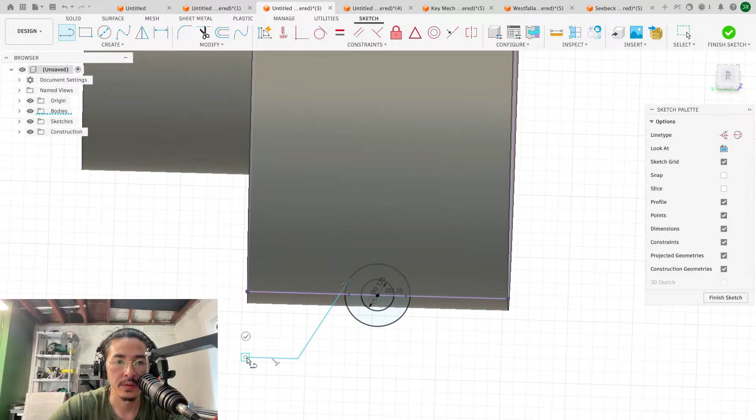And then realistically this can probably come in like that. Oh wait, before we do that though — here was my other idea: what if we kind of went out with it like this? Kind of like a train wheel, like that.

And then — so then if we, do I have to do this? I guess I gotta do this too. So we finish that sketch, and then we do a revolve of this guy around this axis.

And then we do another revolve of this, again around this axis, like that. So instead of having that bar on the outside—because with 3D printing we can make whatever shape we want, which is really nice—I feel like this might be pretty good. The cable will always want to veer in this direction, but it will get stopped by the verticality of this. And we can even add more to this, right? We can go like this, like that, and revolve this around this. You know what I mean?

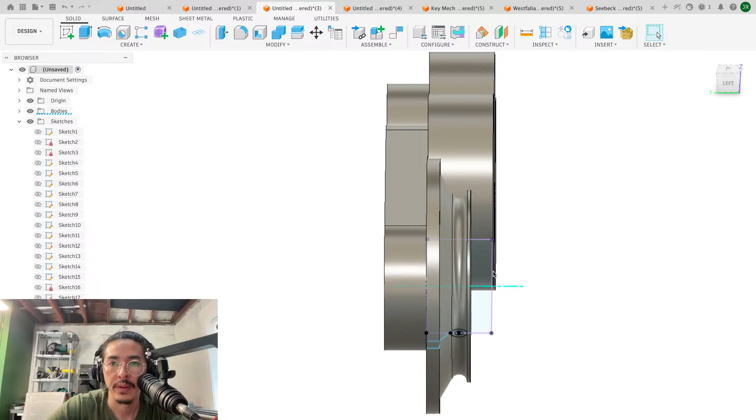Oh, that was a little bit too much, though. Well, let's do it.

So then, obviously... what?

Okay, wait, let's check these prints because I heard a weird noise. Okay, this is going fast, we're already at 22% on that one. This one's only at 15%.

It's looking fine, it's looking fine as heck, I'd say. Okay, wait, let's see once it gets past this point. Yeah, that looks great. Ooh, we might get a little peelage there. I don't know.

I don't know, I feel like this is a pretty good wheel. I could plug in the X2D. Yeah, I'm going to plug in the X2D and we'll print this on there, and then we can even look at it in a second.

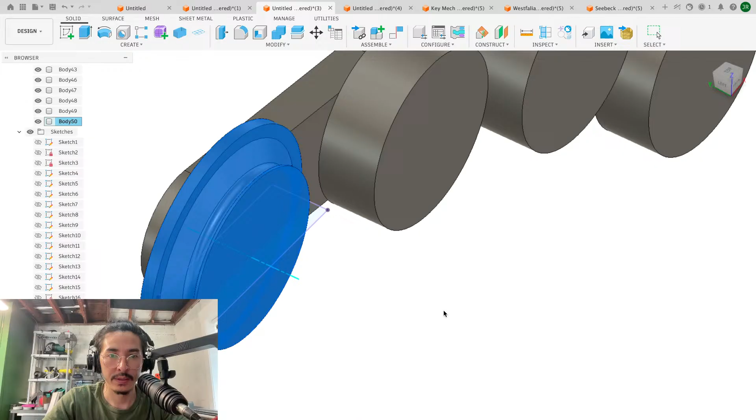Oh, I guess I should put a hole in this.

Is that going to be enough? Do I have screws? Sure, doesn't matter, doesn't matter, this is just a test.

Okay, we're going to call this test roller 1. Let's pop over to our X2D. Oh, it's kind of big. I wonder if it needs to be that big, but that's okay.

Change filaments. Okay wait, I've got to sync, overwriting. Okay. Change filament to yellow. Let's just go with 2. Slice. That's what I'm talking about.

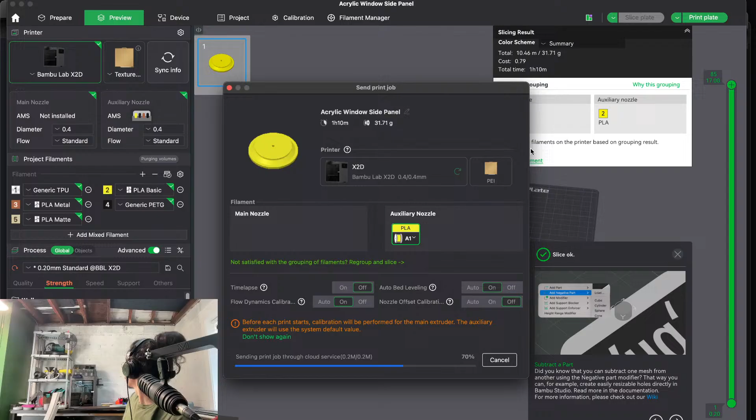Why is it saying this? Convenience mode. There we go. So that's going to be...

I mean, at this point, we're kind of just waiting. I think we'll probably continue this tomorrow, because what I can do in the meantime... and then I'll figure out these rollers later. That's what I'm thinking.

Oh, do I have enough filament for this? You can see how low my yellow is. It's crazy that it knows how much filament is in there based on how long it needs to pull the filament to make the spool go fully around. It's so cool. Anyways, oh my god, this bed is so dirty, but whatever. This is a good test.

I think that's good—this is almost a 3-hour stream anyway, so let's stop here. Let's let these things print. I'll print the other half, I'll print the floor and the other side tonight as well, and we'll see how this roller turns out. If they turn out good, I'll print enough—I'll print 8 of them or whatever so we can try and install. I'm going to need 16 of them, but they're only 31 grams.